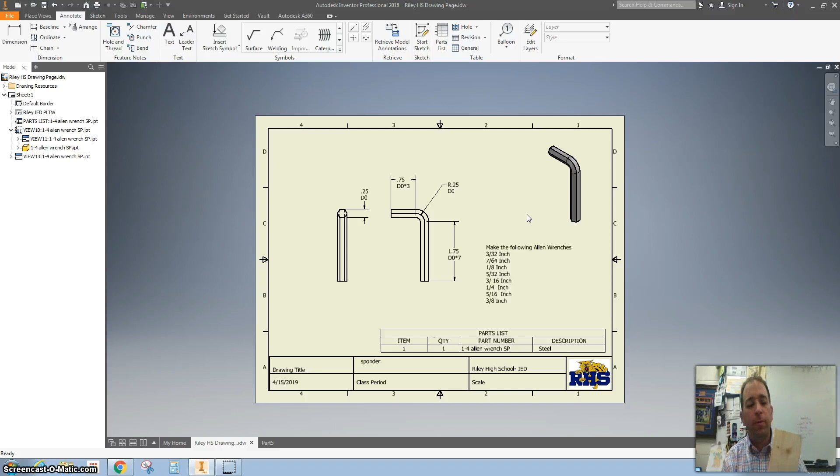Hello everybody. We now have all of these Allen wrenches or Allen keys made. Now we're going to make just a holder with it. We're going to imagine we're using a scrap piece of wood, like a 2x4, which most people have. You can make it lay down or you can make it stand up like this. So let's get started.

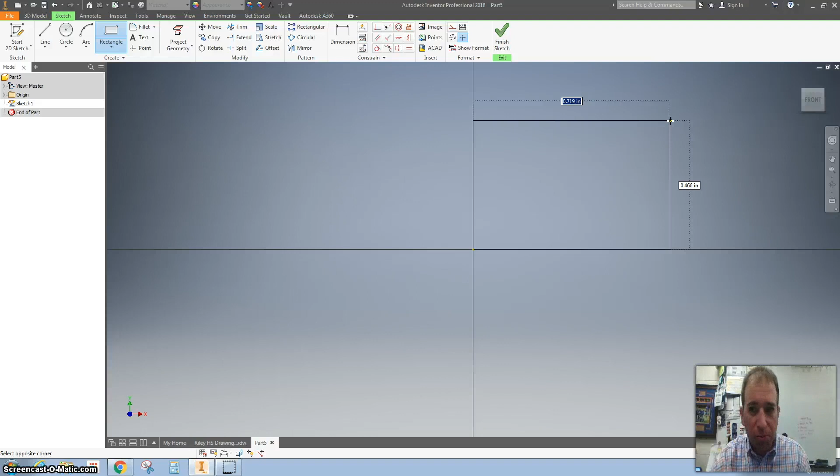So we're going to start a new part, and I'm going to start it on the XY plane. I'm going to grab a rectangle and start right there on the origin. But since we're using a 2x4, it's not really 2 inches by 4 inches, so the width is going to be 3.5 by 1.5. And finish sketch.

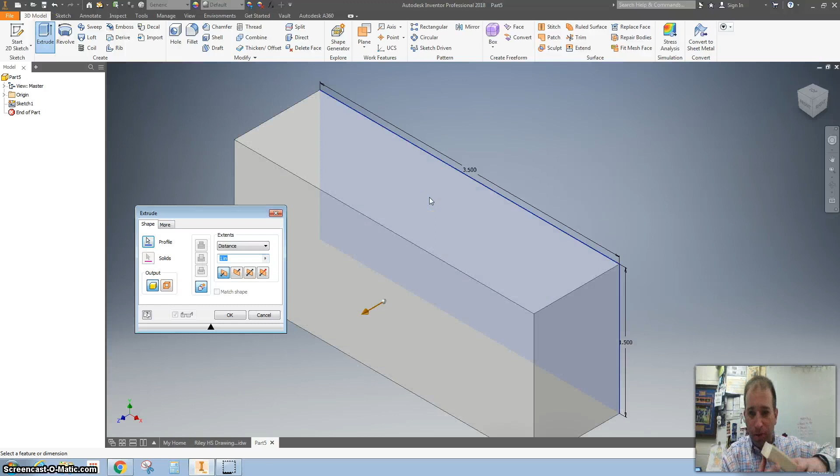We're going to say that we're using this 2x4, which is a half inch shorter — that's where we got the 3.5 by 1.5. And we're only going to use like a 4-inch section of it. So just to make it look like wood, let's change the material to wood.

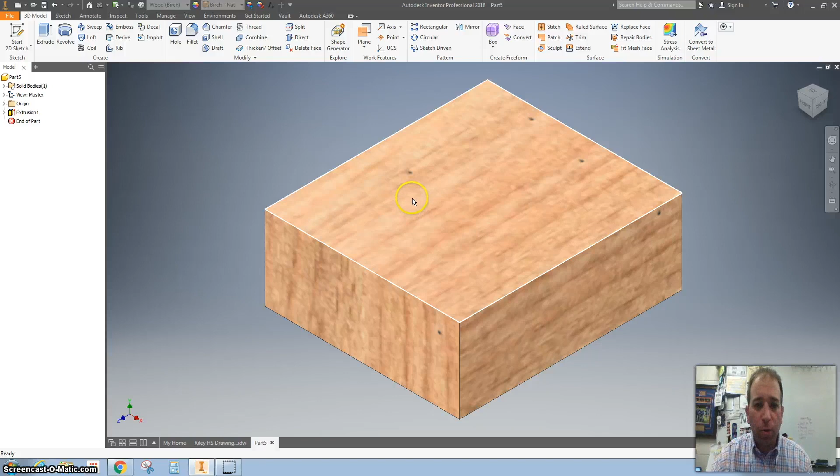There we go. Now let's start knocking some holes in it. So I start a new sketch, I'm going to project geometry, and I'm going to put a circle here. So the first circle I'm going to put—

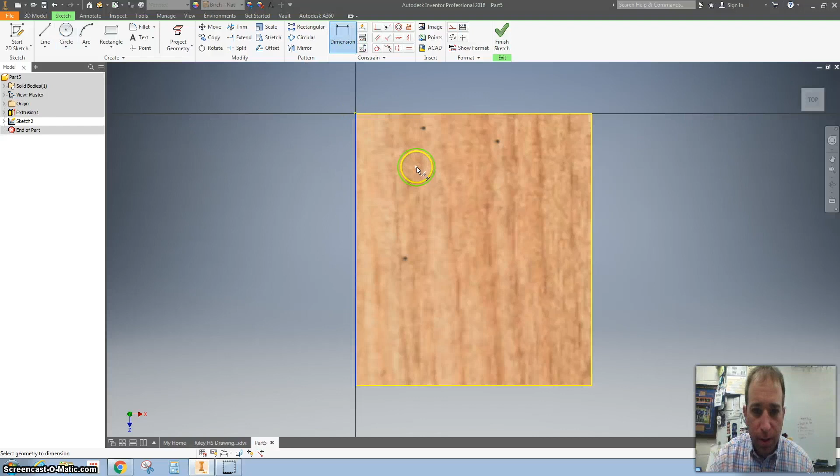Let's go ahead and dimension this. So I'm going to do a location — I'm just going to do 1, and then I'll go 0.75, and then I will make that...

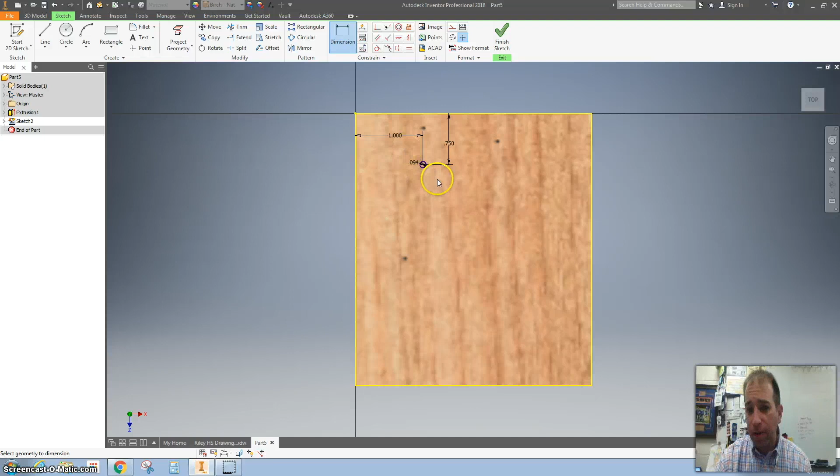The smallest one we have is 3/32. But if I make it that small, then the Allen key won't actually fit into it. So let's double click on that and go 3/32 plus 1/8. There we go, that'll definitely be big enough.

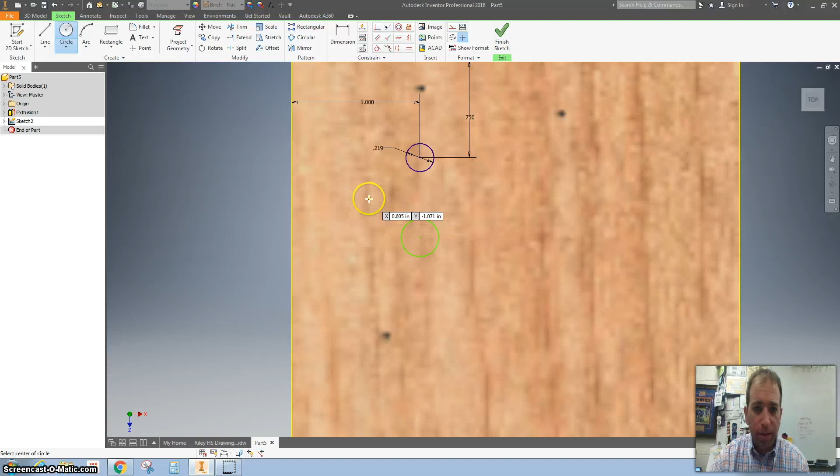All right, now if you take another circle and hover over it, and maybe another circle and hover right below that, and another circle and go right below that.

What we can do is use our constraints here — I'm going to grab a vertical constraint, click on all of these, and line them all up. I'm also going to say, hey, let's just equal everything. Click, click, and then hit my equals constraint.

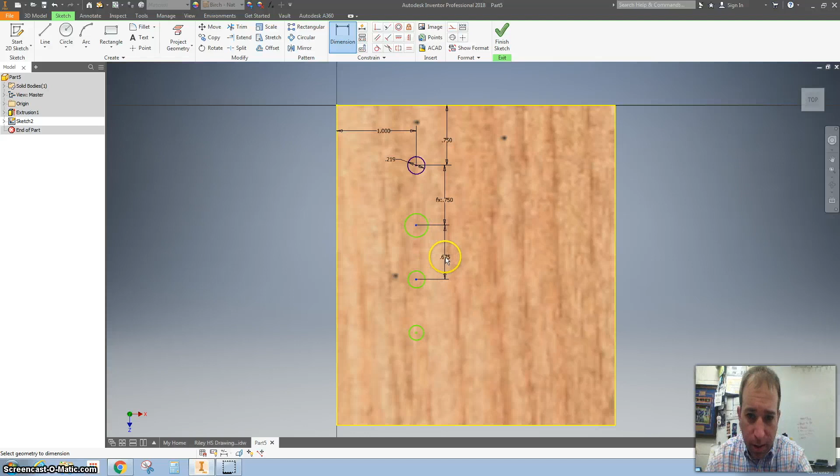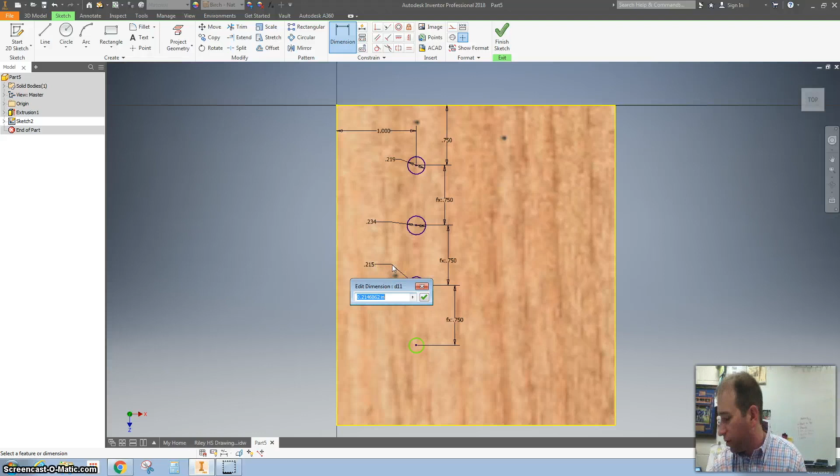Now the next one is 7/64, and we'll just add an 1/8 to that. The next one is 1/8 plus 1/8, so it's large enough. And 5/32 plus 1/8. So we can see it's gradually getting bigger. All right, you're going to do 4 more on the other side.

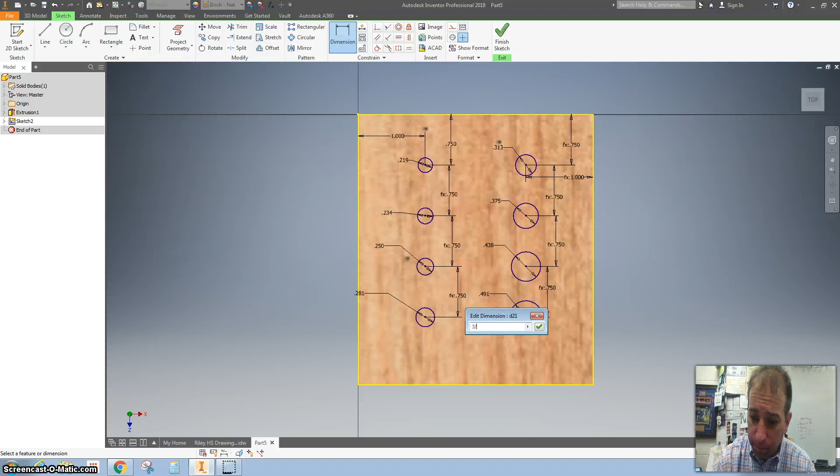All right, now that we have all the holes located and dimensioned, let's extrude them. I'm just going to take them down 1 inch.

One of the last things I'd like you to do is put your name on it somewhere. You can put your name on the top or the side. So start a new sketch, project geometry, and grab a text.

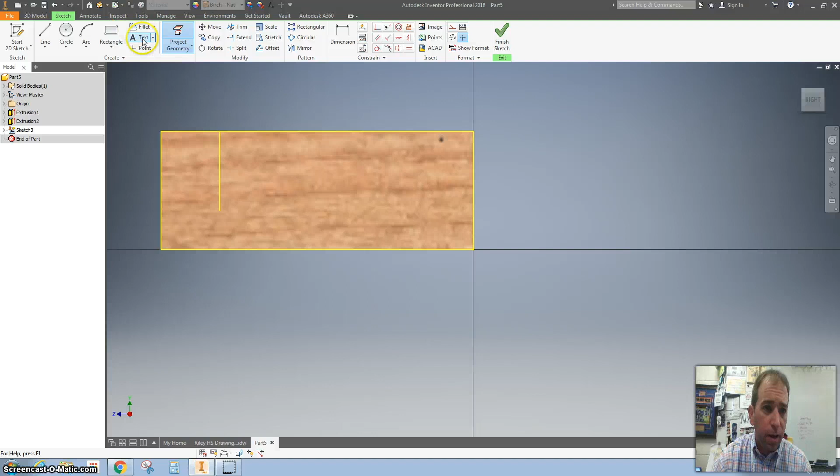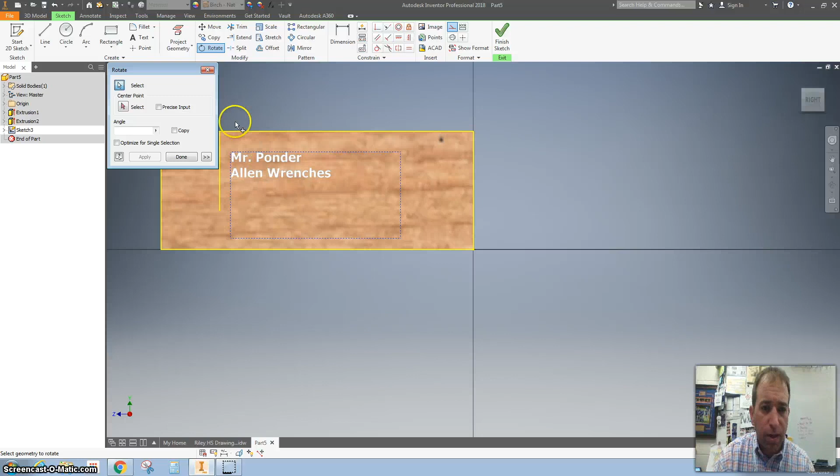You can change the font, you can change the font size, you can even change the font color. And if you hit escape, you can move this. If it's turned sideways, you can grab this rotate and rotate it around too by clicking on it and then clicking on this red arrow and rotating it around.

Okay, now let's save this as wrench holder.